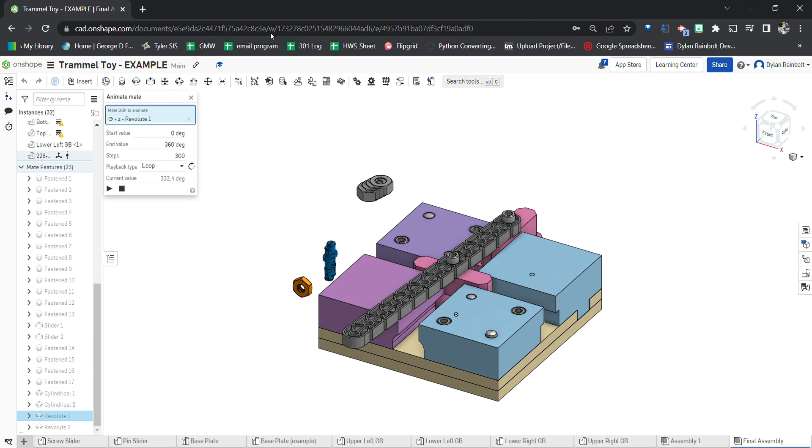In this video I'm going to be showing you how to finish up the Trammel toy assembly. So this is what it's going to be looking like at the very end. There are different steps we can take for this though - right here, the screw can actually be one of these Vex pins. In this video I'll be showing you with the Vex pin added in there.

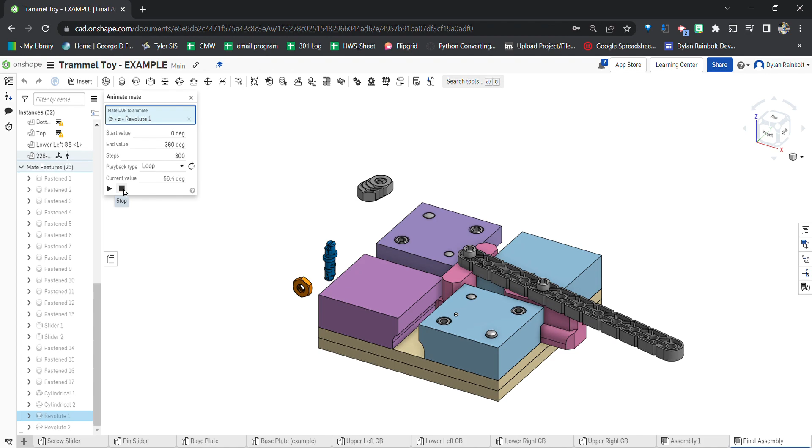Anyways, I'm going to go ahead and stop this, and then I'm going to undo all the actions that I have done. So now you're going to kind of see a little bit of the process of what I ended up doing here so far.

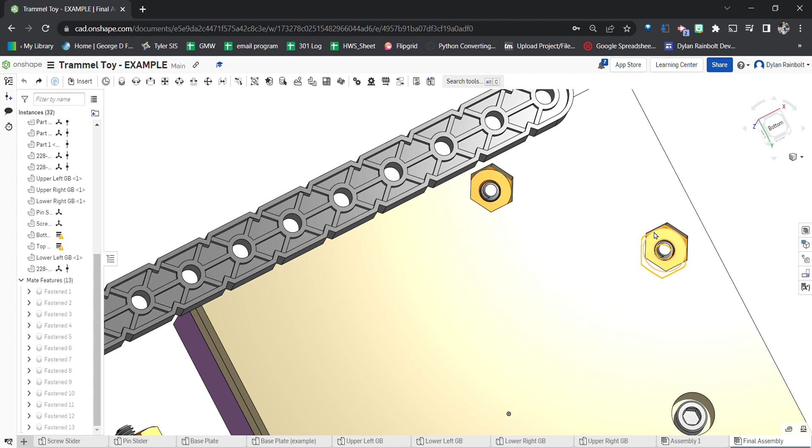Okay, so now we're back to where we were at. Where we were last is we were adding in these nuts over here. We ended up going with these gold looking ones because they were the right size. So with these other ones I've got over here, I'm going to highlight those and delete them, just to clean up our work area a little bit. I also have one of these nuts as well. Now this one is supposed to be added into the bottom of this, so let's go ahead and add that one in.

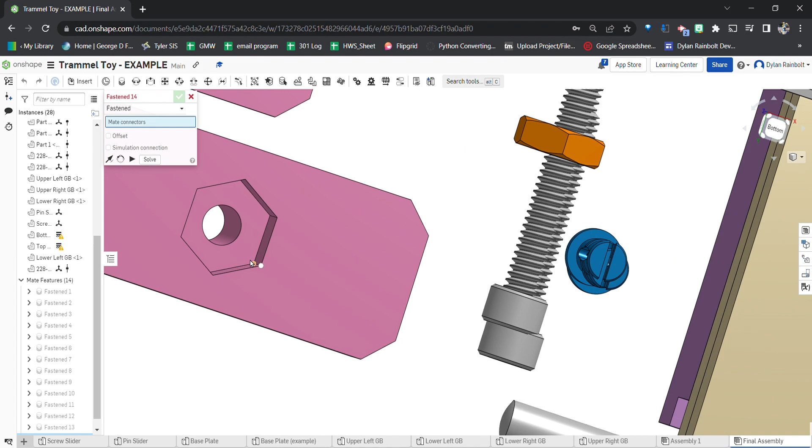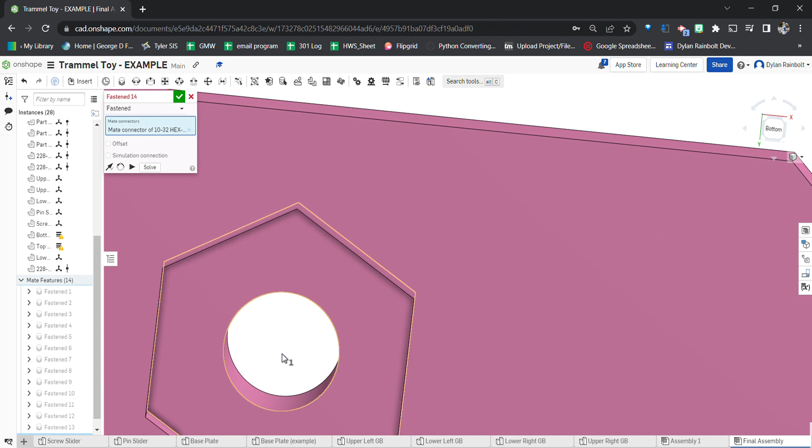We're going to click on fasten. I'm going to be hovering with my mouse over this face, hold down shift, and then click on that center point right there. Then I'm going to hold down shift again, click right here - for some reason when I clicked on this bottom part it did not go with that, so I'm going to click right there again. Now you can see it's in there, but it's going through the material right now, so I'm going to press this.

Now we've got that out. So then the first thing we need to do after that is also delete this guy over here because it was hiding out. I'm going to press the X on that, grab this guy and then delete him.

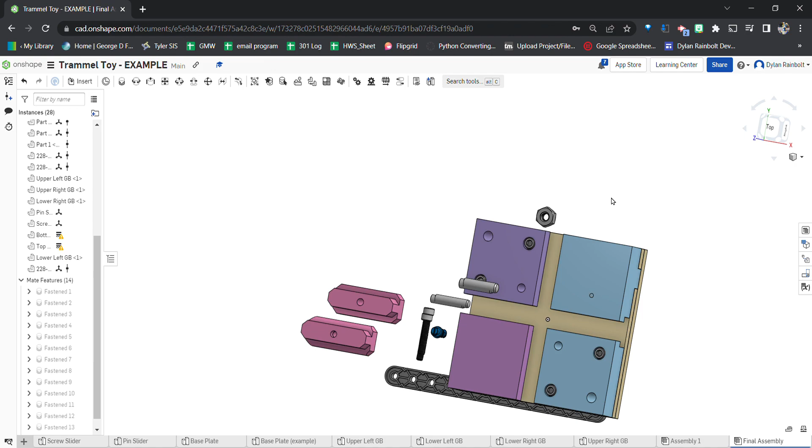Okay, so now the dowel pins need to be added in. We've got the bigger dowel pin here, smaller dowel pin here. So for the dowel pin, we're going to go ahead and do a fasten mate for this. What I want to do is hover over this - now you see this little guy right here that's switching up. What we want is for that to be facing right at us, just like that.

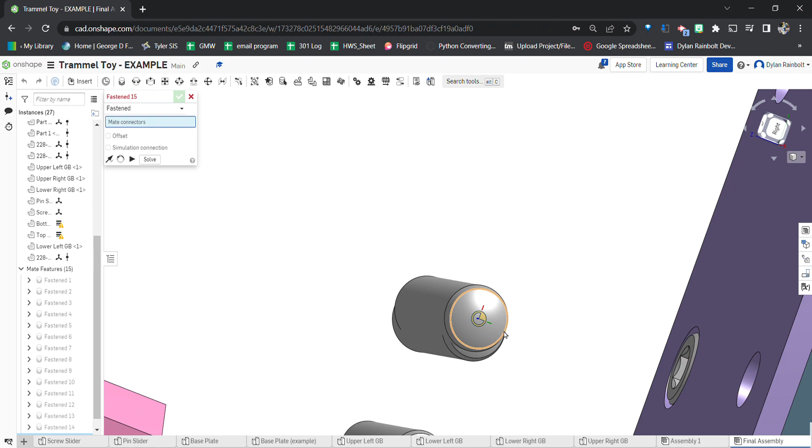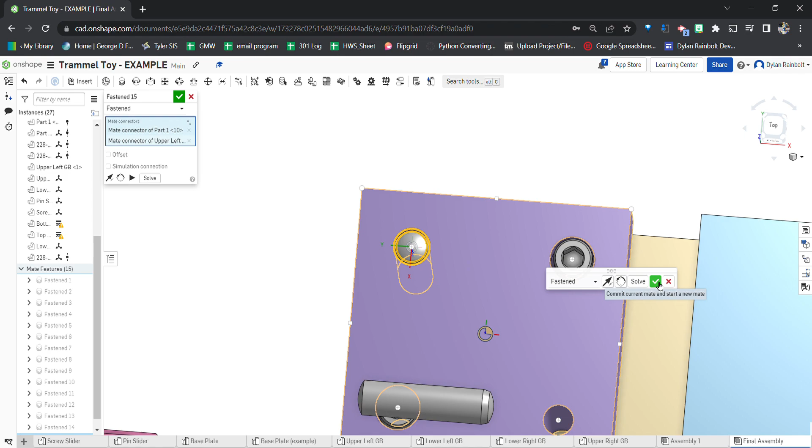So if you hover over the edge of that, you'll end up being able to get that correctly selected, and then we can hover over this edge again right here to that circle. Now we want to flip that axis. Basically my advice for you all is you just got to get in there and try this out - you've got to try to flip the primary axis if something's not going in correctly. Sometimes you got to mess around with that, or the reorient.

So then the other big dowel pin here, once again remember we want it to be in that orientation there. This is the bigger dowel pin hole, so we're going to go ahead and go right here as well, and then we need to flip the primary axis.

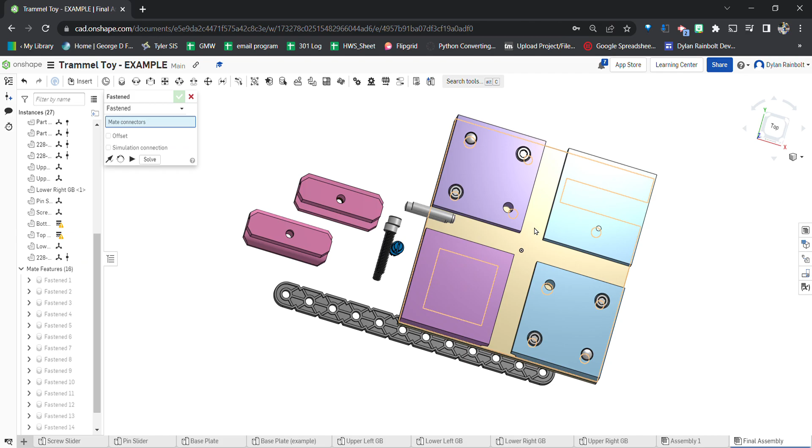Okay, so now the next part is we've got to get these smaller dowel pins. Just hover over there again, hover over this guy, flip the primary axis, green check mark, done. Next one, right here, that edge, and then click on this edge of the circle, right there - flip the primary axis, green check mark, we're done with that.

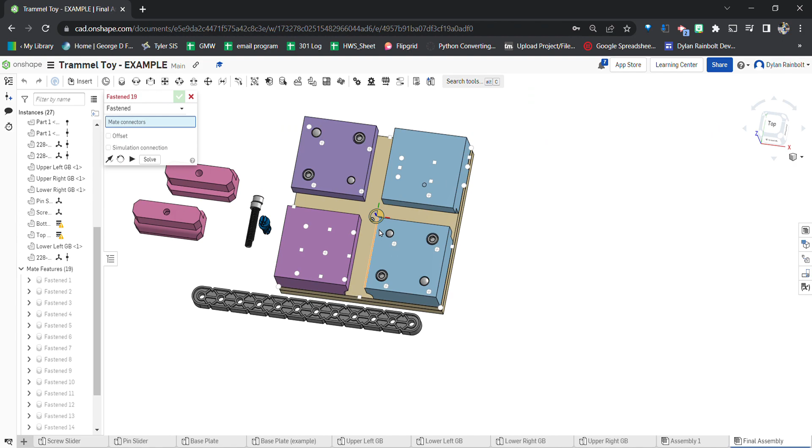All right, so the next thing we want to do - we can toggle in here. After I've gotten that, and it's asking me for mate connectors, I can toggle the tool I'm using, the mate tool, by just pressing that drop down. So what we're going to use next is actually the slider mates.

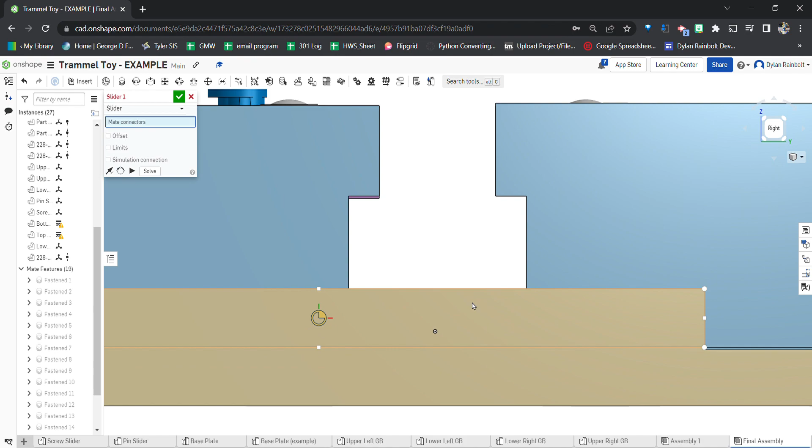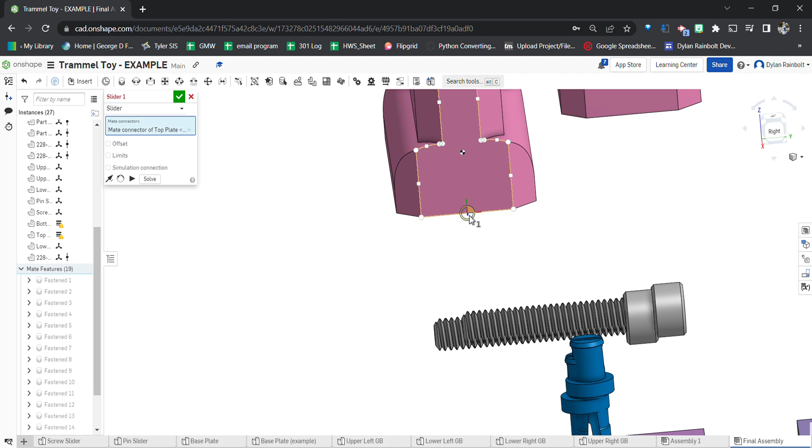So we want to find the slider, and what we're going to be doing is setting them up so that they can slide on here. We want to go ahead to one of these sides, hold down shift, and click that guy right there. Now what we want is for our pin slider mate to be going through here, right? So now I'm going to come in here, zoom in, hold down shift, click this guy, and now you'll see if I press play here, it'll show you the movement, and that is the correct movement.

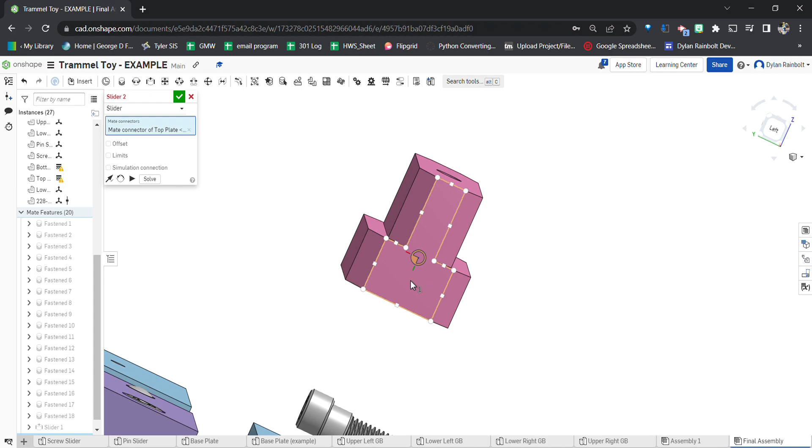So I'm going to go ahead and press the green check mark, and next we need to go to this side and add in another slider mate. I'll click slider mate again, go right here, hold down shift, click right there, then hold down shift, click right here. Okay, so now if I press play again, we can see that movement one more time. So now we're going to press the green check mark.

There are limits that you can set up in here. We'll be talking about these later on. The limits basically allow you to say, okay, this cannot go past this point or this point.

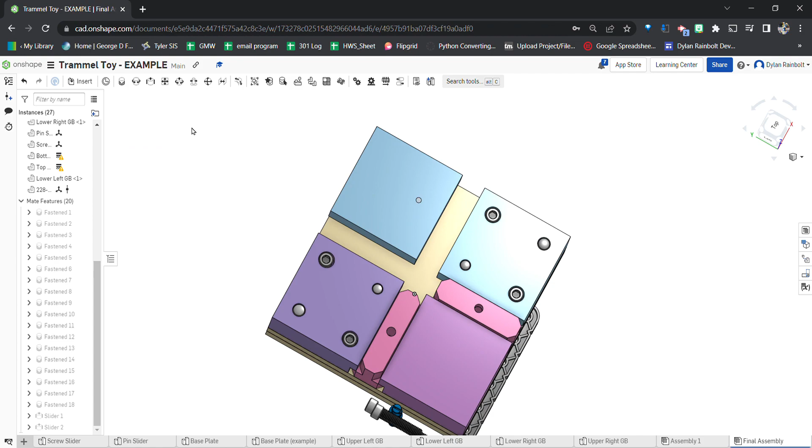But actually for the Trammel toy, we don't need that because it'll already be limited just by the movement. So the next thing we need to do is bring in this Vex crank arm, and then add those pieces on.

In the first part, I showed you how to bring that in. What we're going to do is use one of these screws right here, and then also one of these Vex connector pins.

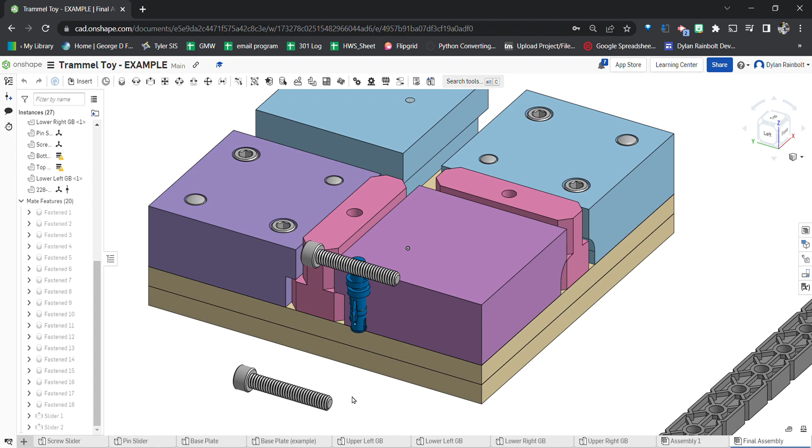So for the Vex connector pin, what I want to do is use a slider mate. I'm going to hold down shift, and click on this center point right there, and then also hold down here.

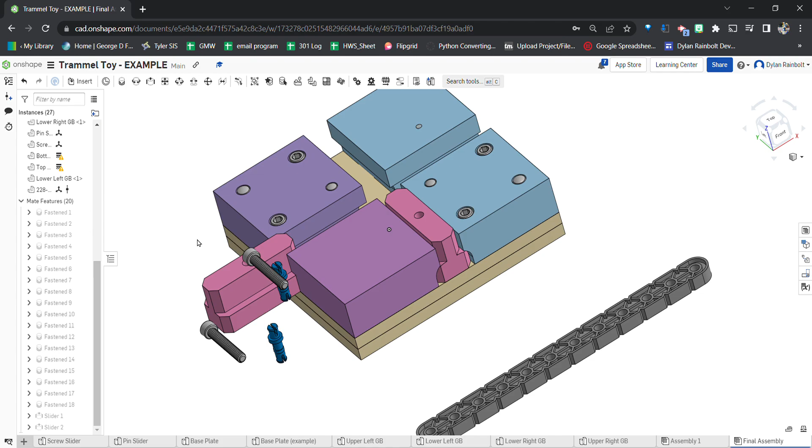Let me get out here and make sure that this is the one with the nut on the bottom. So this is going to have this guy in here. If we go in here, we can do the slider mate again. Technically this would be the cylindrical mate, but I'm just going to use the slider mate because the cylindrical mate can sometimes give you a little bit of issues. So I'm going to flip this just like that.

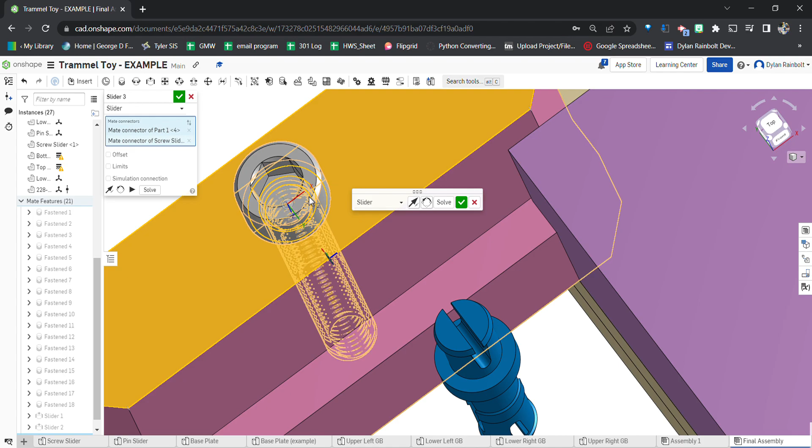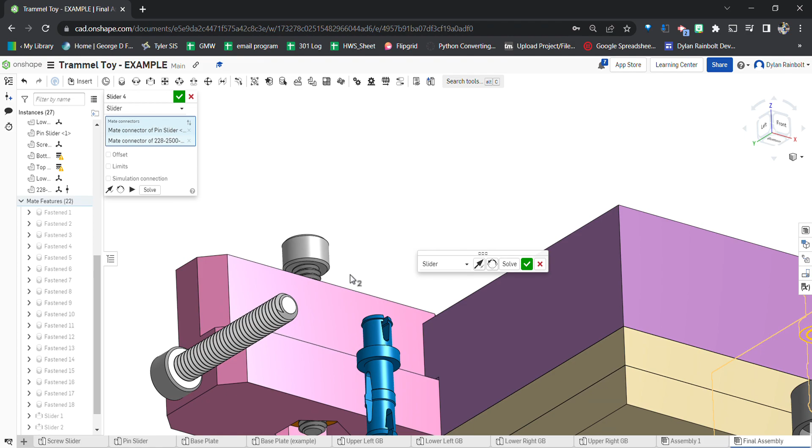Then I also need to raise this up a little bit. Next I'm going to click right here, and then also click down here, and hover over this face, hold down shift, and click on the center there. Now you'll see that both of these are added in there.

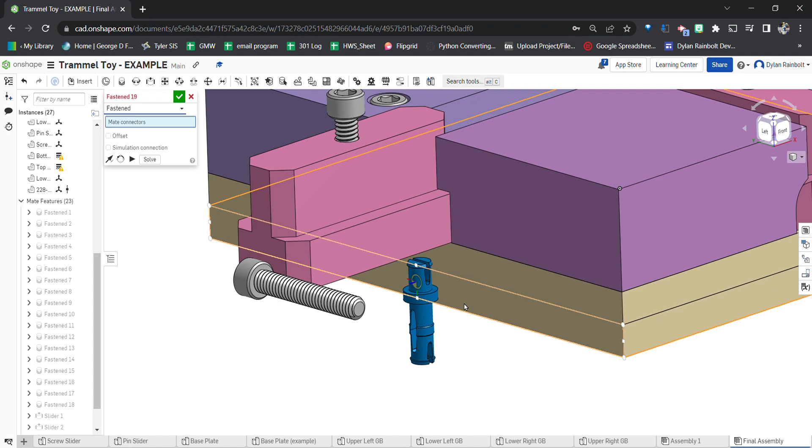So now I want to raise this up, and then add in this guy. On the very far edge of this, we do need this guy to be set up. So I'm going to do a fasten mate, and fasten this guy - hold down shift, click right here in the center.

Then we're going to come over here to the Vex IQ crank arm, hold down shift and click right here. Do you see how I'm hovering over this face? Any part of this works - just hold down shift, click right there. Now green check mark, boom.

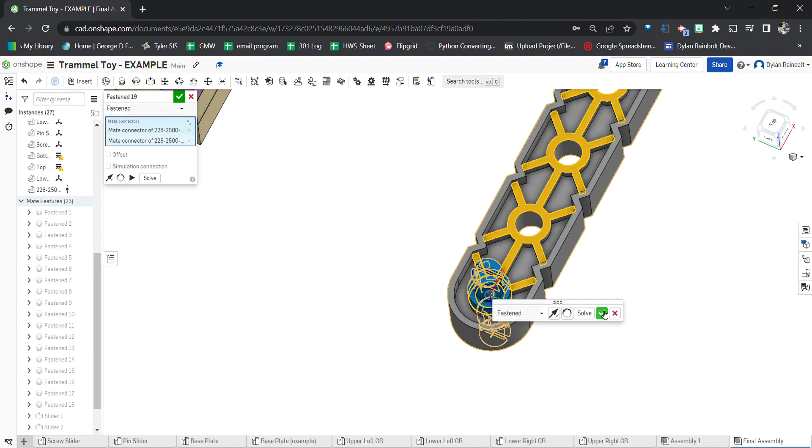Next we want to go to the revolute mate, and hover over this guy right here, hold down shift, click on the center of this. Now we're going to set this up so that it will be in line with this guy. One mistake I made is that we actually do need to - I'm going to press the green check mark on that for right now. We'll come back to it because it's giving me an error.

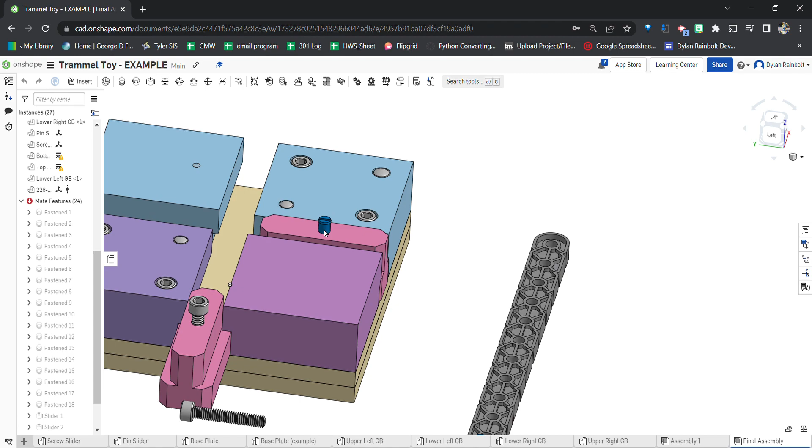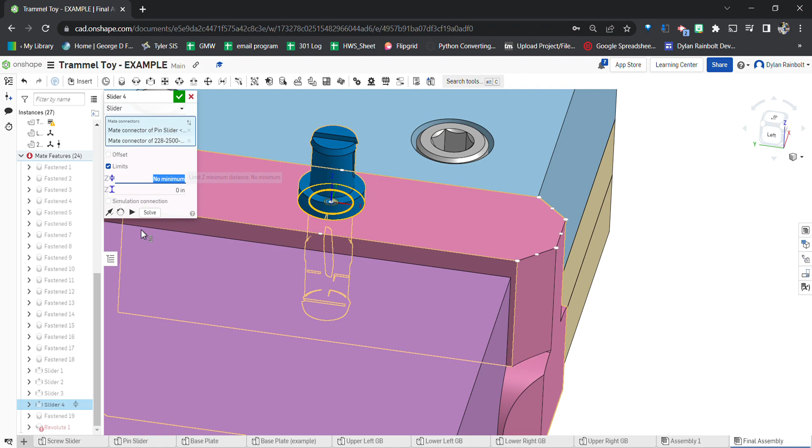We need to set this up so that it's right here. Now that was the slider mate. What I can do is set a limit on that - I'm going to make the minimum be 0. If we look at this, that's going way too far, so maybe the maximum needs to be 0. Let's mess around with that. There we go, perfect. So now it's basically not going to go into that material anymore.

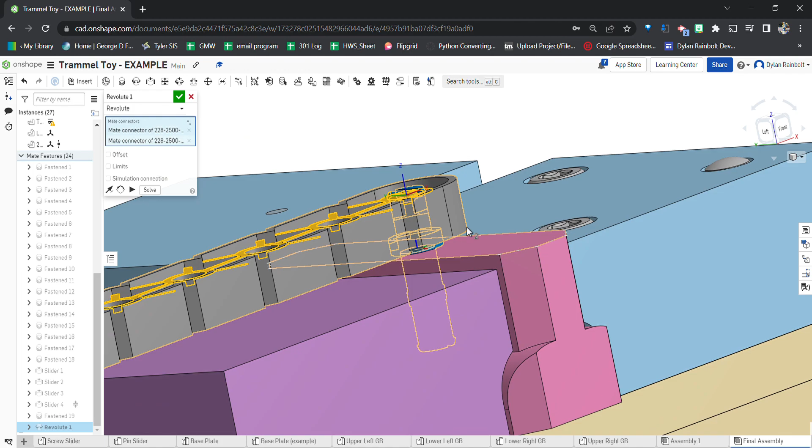So now we want to go back to that revolute mate - we already selected that hole right over there. What I want to do is find the identical hole over here. I'm going to hold down shift, and go to this guy. Now you'll see that that is set up correctly, so I'll press the green check mark on that.

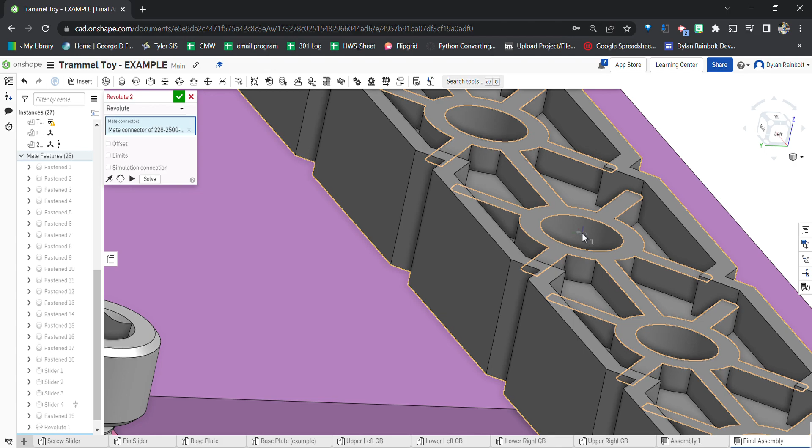Finally we want to go 1, 2, 3, 4, 5 holes out, and set up a revolute on this guy too. So click revolute, 1, 2, 3, 4, 5, and right here hold down shift, click on this guy - boom, got that one. Next we come in here, hold down shift, click on this centerpiece, and now we've got this guy set up.

Press green check mark, and now as you can see, we've got this oriented correctly. I do have an extra screw right here - I'm going to delete that because we simply don't need it.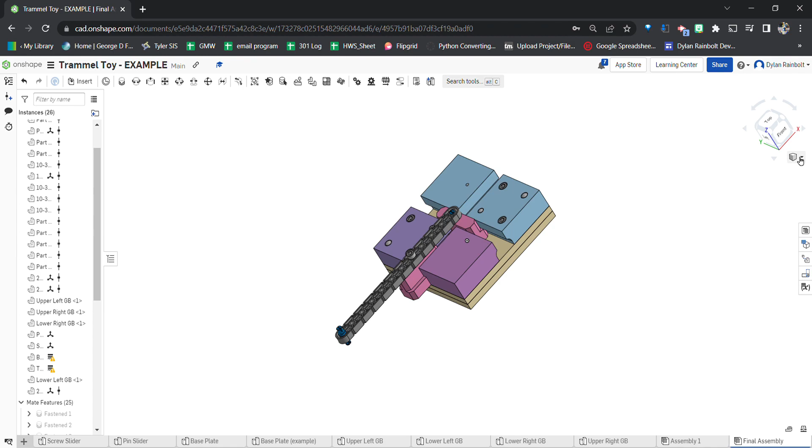I'm going to go to my isometric view, and then click on either of these revolute mates. You'll have to try it out yourself, but click on either of these two and then click play. What you'll see is that you now have the animated motion of your Trammel toy.